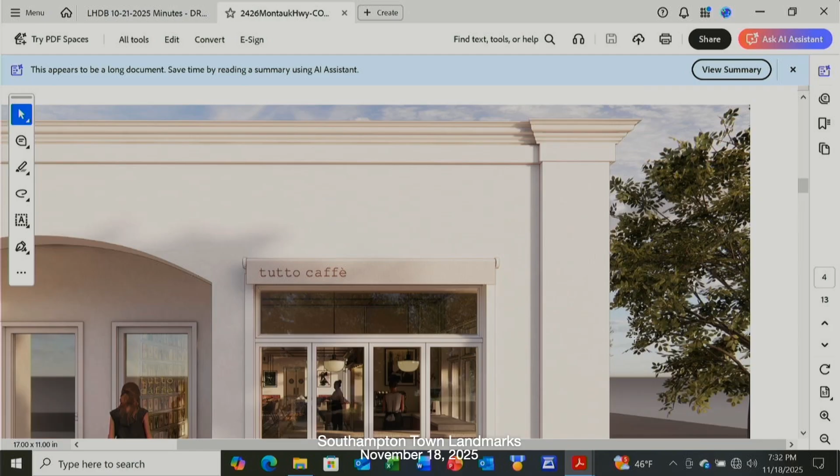Would you like to come up to this way, so we can hear what you have to say? The only difference was movement to the windows and doors relative to the approval you already granted to the color change. Great, move a little closer to that microphone. Oh, sorry.

Okay, so I have on the screen here what's proposed, I believe, which is the large window. Is that a folding door that opens? Yes, in the front, that's the same - forgive my lack of architectural knowledge, but that's the exact same opening. It's just a change of windows, and it opens up to the outside.

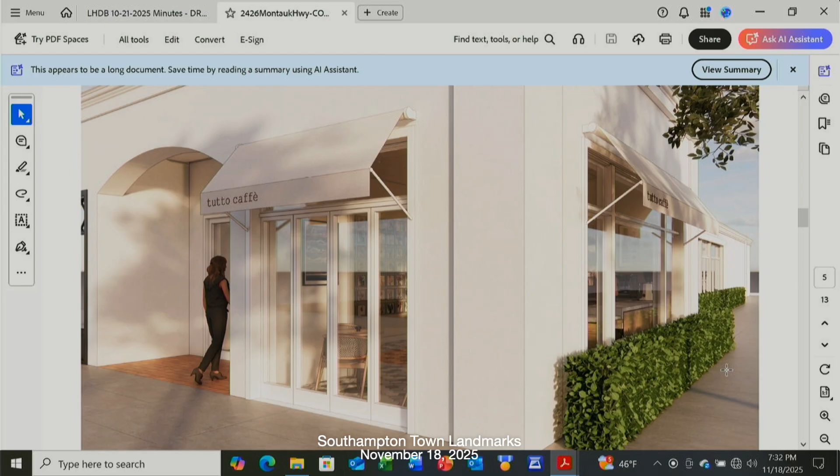Okay, which would allow fresh air, yes. And the change is on the side facing the parking lot, down to the right. I think it's probably the next picture. Yeah, this one? Well, that's the exact same opening also - new windows.

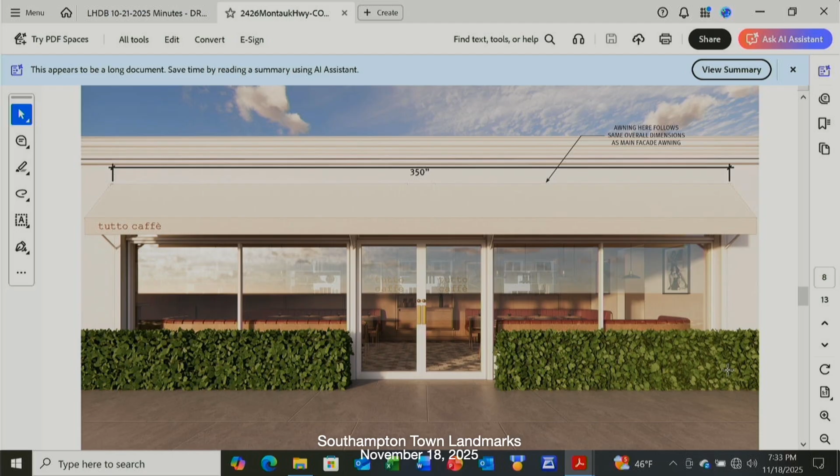So that door is now moved. It used to be to the right where the hedges are. We moved it and put windows on each side. It allows more natural light into the space, which with hindsight should have been done probably 30 years ago, but that's a separate issue. And this is a side wall facing the parking lot? This is facing the parking lot, facing where Thayer's is on the other side.

Okay, correct. Yeah, there's no structural change to the building, there's no expansion, just new doors and windows, and in my humble opinion, it's a refresh, a little bit more brought up to date.

Looks like you're adding a light here over the door. Is that going to be behind the awning there? The Architectural Review Board discussed that with me, and we discussed that the architect might not have been aware of that. It does conform with the approvals as far as lighting going down, dark sky, and all that sort of thing. But that might be something we would adjust - I think he discussed something that was discussed with the Architectural Review Board.

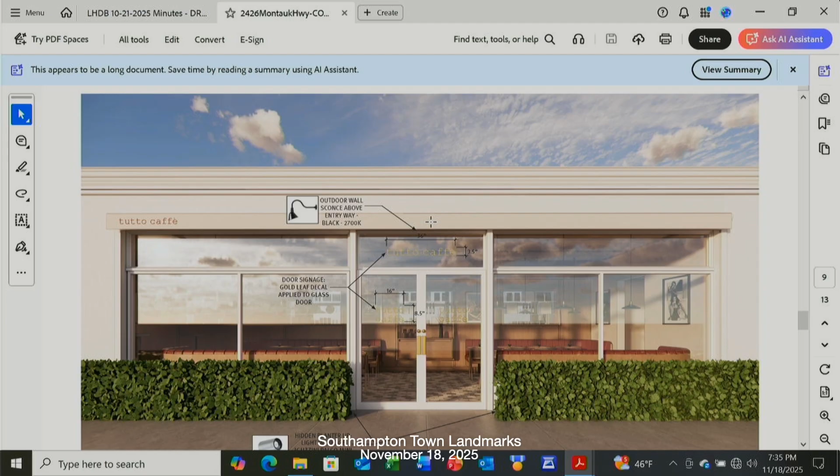Okay, this is an existing condition, yeah, that's existing. And this is the other existing condition, yeah. Could you go to the front view, up one, to the existing? Now, is that all one building? It's all one building, correct. So, right, so the only thing changing there is...

So are you gonna do anything on the left at all to match it? I guess that's like the front view, and I see two windows that match. Well, actually, you know what, to correct myself - it's a very good question you asked. We would at this time like to make that window on the left match the one on the right. Now, it won't be an opening one, but it would be without the little detail up here.

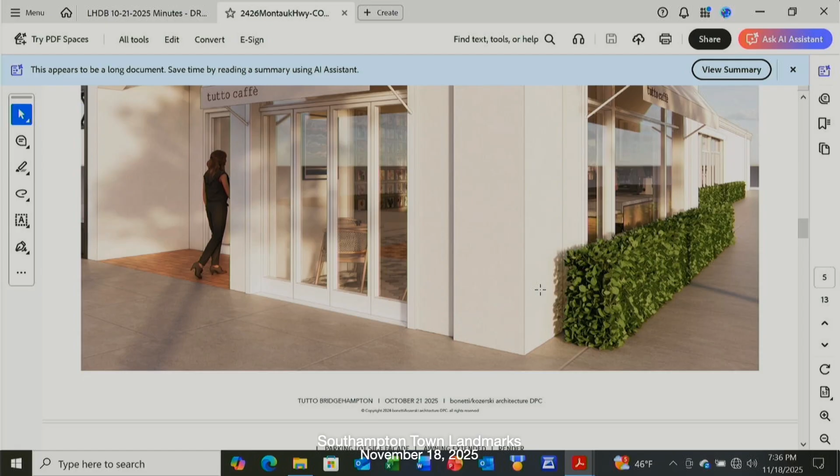Okay, is it going to resemble - well, let's go back up to your entry. It would match that, yes, without the openings, without the doors. Correct. Would there be vertical divides in the glass to mimic the pattern in the operable door on the other side, or would it be a single pane of glass? Probably just plain glass. That would make more sense, honestly, over there.

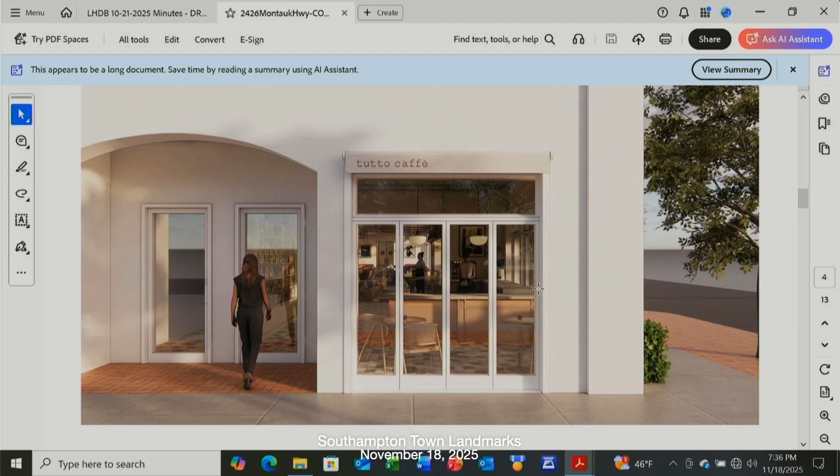So this application only includes the Tutto Caffè side, it doesn't include the left side. That is correct. Are you gonna be submitting another COA for the other side of the building, or? We're not doing anything over there. Well, I guess we would have to - if you're going to be changing the windows on the other side. I mean, I don't need to change the window. That's a very good question, and to be quite honest with you, I hadn't thought about that prior to you asking me that.

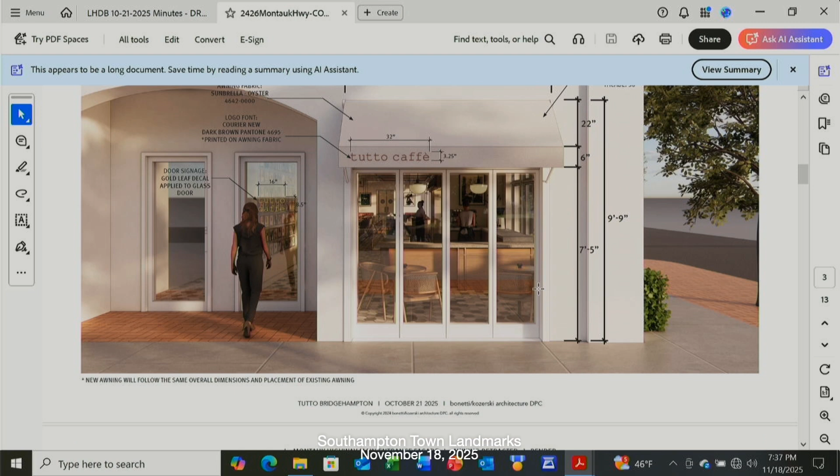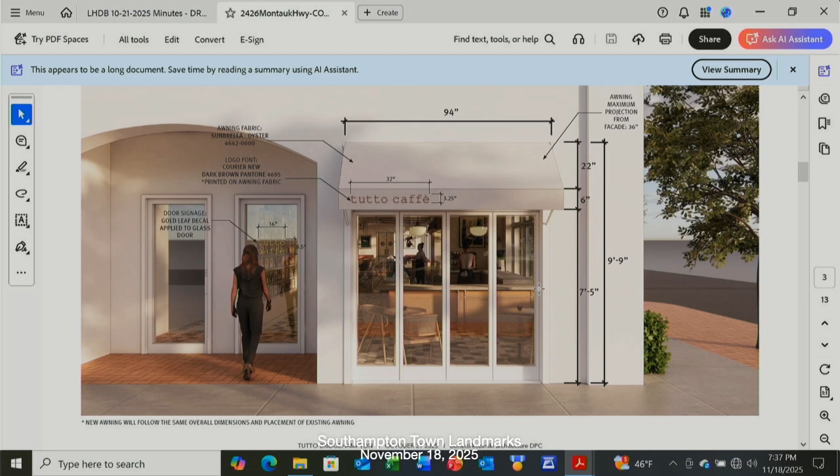And I wouldn't do it without your approval, but the plan was not to do that immediately. I was thinking of doing it down the line because we needed to order some new windows, and we've already discussed that we might as well just order two while we order one, but we're not gonna do it without your approval. That's a very good question you just asked, so thank you for that.

What is the timing on getting all of this done? Would it be more efficient at this point to suspend this COA application and put in a revised one that covers all of the work you plan to do, or? I would actually prefer not to do that, and I don't need to do the one on the other side of the building at this time, because we are under somewhat of a time constraint to do this for next spring. Okay, that's our ideal, so it would be for this side.

The other side, if we were to replace that top part of that window, that's a one-week job. I would come back to you and get your approval and just do it at that particular time.

We just thought about making it more consistent, without the blue Ferrari in front of it. But that was just there when we took the picture. Yeah, that was a joke, but that's okay.

So did that answer your question? Yes, it does. So you're only going to be doing work at this point in time on the right-hand side, easterly side of the building? Correct. So we're going to take it from looking like this to looking like this.

Correct, and this has been 30 years. We did this 30 years ago in 1995 when I purchased the property, and it hasn't been touched since, and it does need a refresh in my opinion. Which is why we're changing the color also. Since I was here last time, things happened with the tenant and so on.

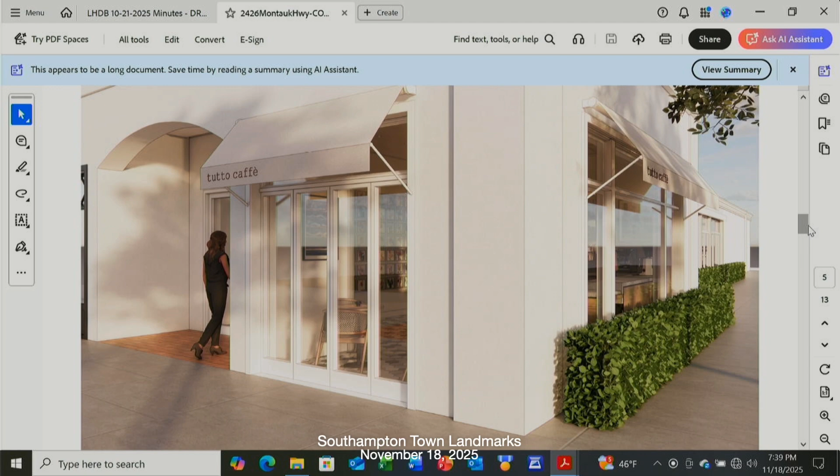It is going to change the appearance of this building considerably from this. The whole stucco appearance is not particularly going to change, it's going to be a slightly different color. But these are kind of interesting, historic-looking windows, not so visible with the awning here. So that is going to be a major change, replacing them with modern windows.

Well, the awning on the left is also rolled up at this particular time, so in that picture you can't see it.

I hear you. Right now they do allow outdoor seating there, which actually would be more conducive with the doors that open. Personally, but I see that, yep.

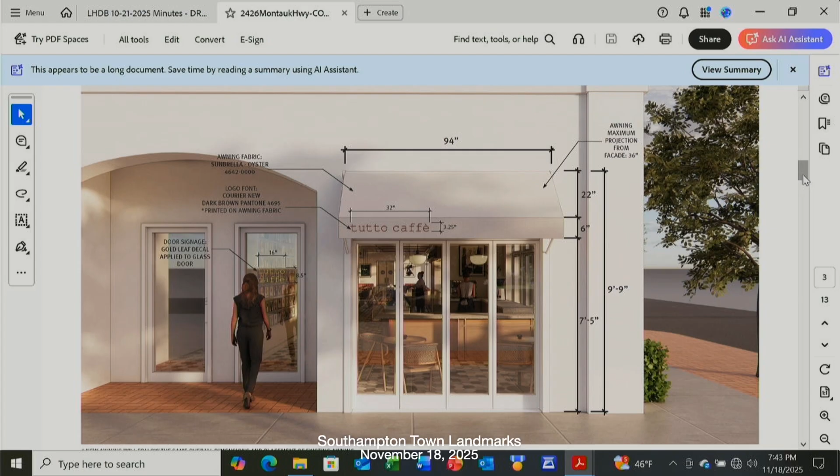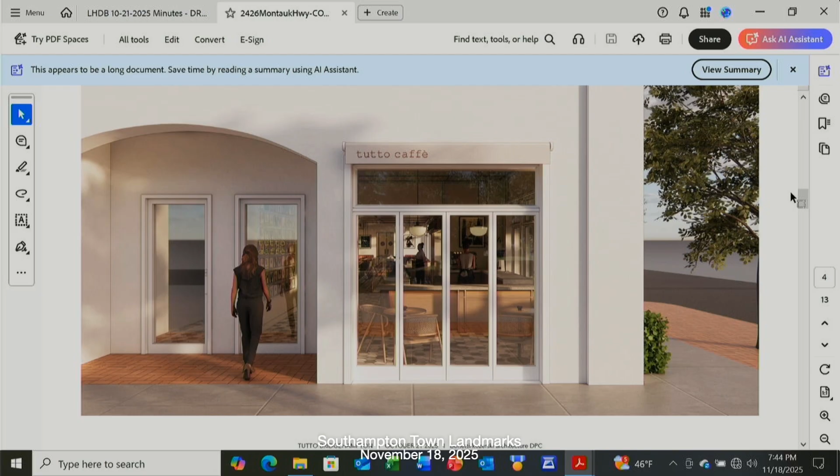My intention is to make the two windows, especially with the transom area, match, so that if the awnings are retracted, they would match. I'm not necessarily sure that having opening doors, which personally serves what's going on in the community these days with outdoor seating and so on, which seems to be something people like, is contrary to a full pane window on the other side.

I readily admit I can't name every storefront on the street and tell you what looks this way or the other. I do know Bobby Van's has opening windows and doors. I'm not sure how everything is completely consistent, but whatever. That's my comment.

So the two doors to the left, are they being changed? No, those doors are staying exactly the same. Those are the existing doors that are there now. Because they don't match the photo there - one has a light cut at the top, the other looks like it's painted black. The architect probably took a little artistic license, but we're not changing anything with those doors.

Okay, so the doors are going to stay like this. Yeah. Okay, the color of the building also looks lighter in the architect's drawings? We already got that approved by this board. We went through the COA for that. The only difference is we're changing it from yellow to basically an off-white.

So did we discuss the awnings at that time, the color changed as well? The awnings, I don't believe had been addressed, but when the time comes for the awning to be replaced, that will go to the ARB, I believe, or it'll come here too, because this board came into being after the last time we went for awning approvals.

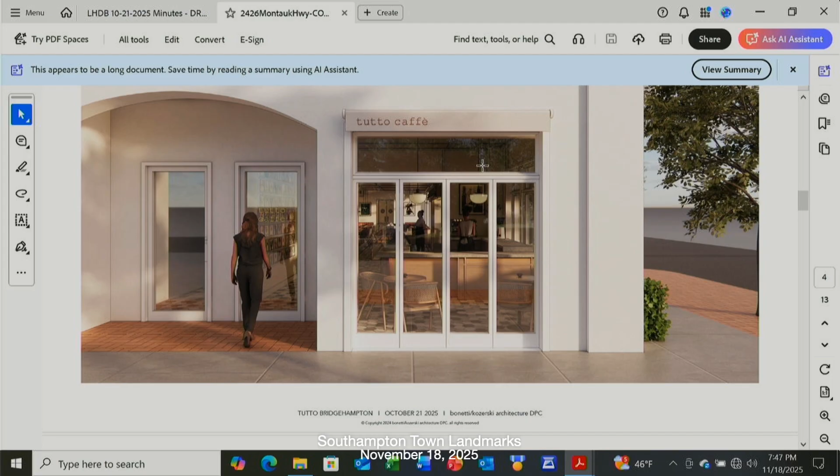My personal opinion is I hear where you're coming from to a certain point, but I don't necessarily agree that it fits in with current architectural standards and what things look like within the community. I see things on that street that I question myself, further down the road to the west, where that building company is - I don't get it, but that's a separate issue.

That's why you're here now - because of that, that's why you're here now. Yeah, the community has spoken. Okay, fair point, and it's a very fair point. I get it. I mean, I personally think this is a really attractive, good look.

I think it's a more contemporary look, and that may be up for discussion - contemporary versus historic. I'm not so sure I'm going to call it that. This was one of the first projects I ever did when I got involved in the business that I'm in, and the architect that did it for me was a very traditional architect.

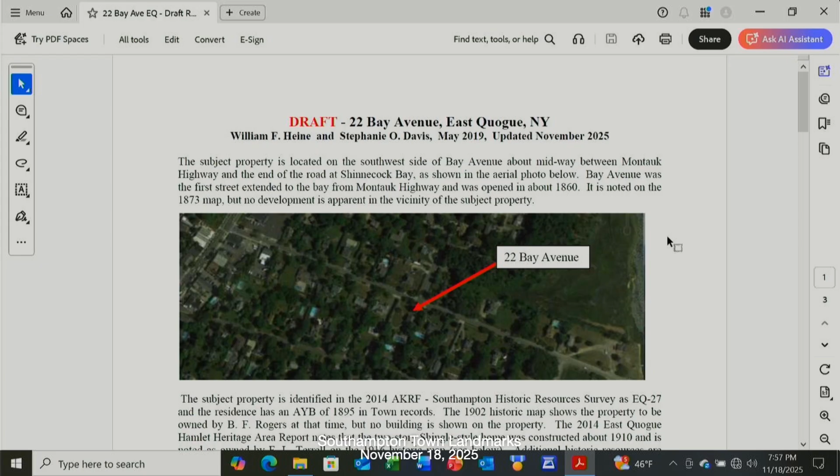In 2019, a large addition was done on the rear of the residence. The roof line on the second floor shed dormer was modified and a bay window was added to the side. Since that time, a swimming pool has also been added to the property behind the house. The current application is for construction of a one-story garage pool house next to the existing dwelling and conversion of a third-floor bedroom to a bathroom in the dwelling.

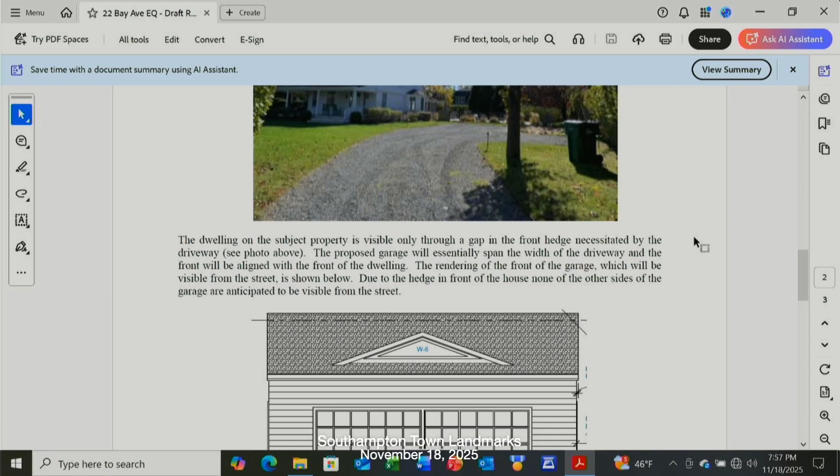The floor plans do not show the windows on the third floor, and exterior elevations of the dwelling were not presented as well. But I did speak to the applicant and was advised that the windows will remain as they are. They're not being changed. There are no changes to those windows, so there will be no outward appearance to what occurs on the house.

The dwelling on the property is visible only through a gap in the front hedge necessitated by the driveway. The proposed garage pool house will essentially span the width of the driveway and parking area and be aligned with the front of the dwelling, not the porch, but the first floor wall beyond the porch. Due to the hedge in front of the house, none of the other sides of the garage are anticipated to be visible from the street. As you go down to the drawing, this is the garage that's presented.

Stephanie and I had discussed this, and it's a little awkward in the space above the garage doors, which is unusually high. The reverse gable is unusually small. The garage doors are not specified. Oftentimes, doors that look like this contain translucent panels so that when you turn on the lights on the inside, it glows through the doors on the outside. And it doesn't really have any of the character or details of the dwelling on the property.

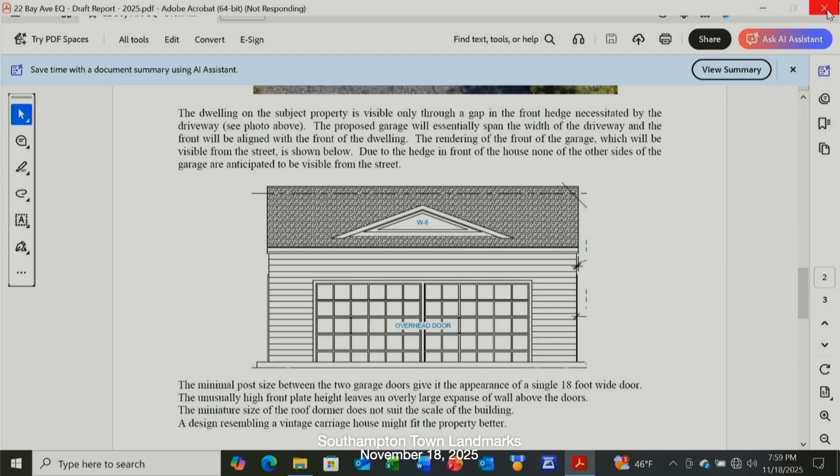So we were hoping that—and I know there were variances granted for this garage—that it could be pushed back a little bit. There is room behind this building. Between it and the pool, it could shift back a little bit so that it wasn't as prominent as the front of the house. And if it could be detailed in such a way that the reverse and the doors were more in keeping with the historic character of the dwelling.

Yeah, and the house is in great condition, and also the AKRF had stated that it was worthy of review for landmarking.

Would you like to say a few words?

Hi, I'm the agent for the application, Susanna Herman from N Consultants. I don't know if the architect was able to attend on Zoom. I know he had a sick child and I wasn't really expecting him.

Moving the garage/pool house back away from the road would be problematic. We would have to go back to the Zoning Board of Appeals. We had to get a small variance from total side yard setbacks for that.

It's pretty close already to the existing slate patio, which the family uses adjacent to the swimming pool. It is set back visually from the front porch. It's in line with the front of the house. And it's designed to work with the pool and the addition that was built in 2019. It's sort of centered or lined up with the edge of the pool so that it works as sort of a backyard, courtyard type feel when you're in the backyard.

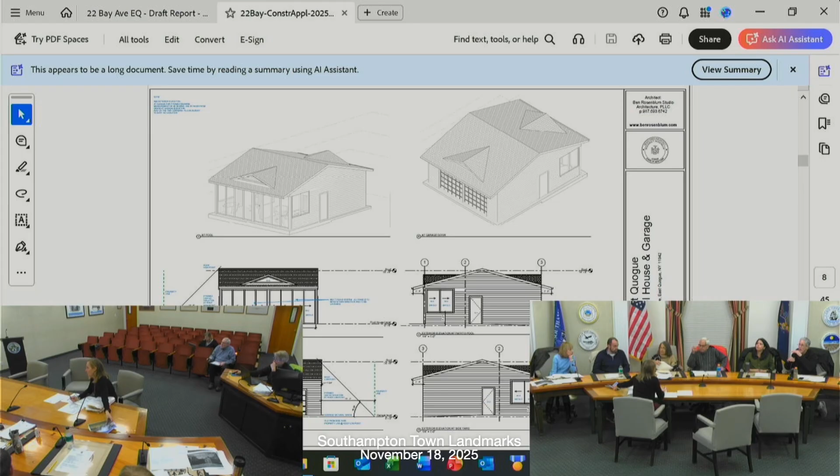You don't see the addition in the back, but you do see the front of the garage. And I can understand, looking at the cross-section, that they want to get greater height in that sort of pool house section on the back of the garage. But they could bring down the plate height in the front, because that's just the garage inside.

If that came down closer to the top of the garage doors, it would look more like the height of the porch. I think there wouldn't be as much of a need visually to push it back further, because it would relate a little more to the scale of the house.

Just to answer your question, the height of the garage is 14 feet. That's not the concern, it's the angle of the roof. I'm sorry, I'm not an architect, I don't know.

What does plate height mean? Plate height is the top of where the wall would meet the roof coming down. So the lower the plate height, the more the roof comes down, the scale of the building when you're looking at it is lessened.

It just seems a little bit overscale for having it be so close to the house as it is. Right, so that would definitely help if they could bring that down, so it looks more like the height of the porch - so this garage doesn't look so massive.

So we'll let the architect kind of determine what would work, especially if they look at elevations of the house, of where the line of the porch is, because it is so close to the historic house, it's really important to have a balance and take some sort of datum from that house and carry it across if we're not able to give it as much breathing room and space.

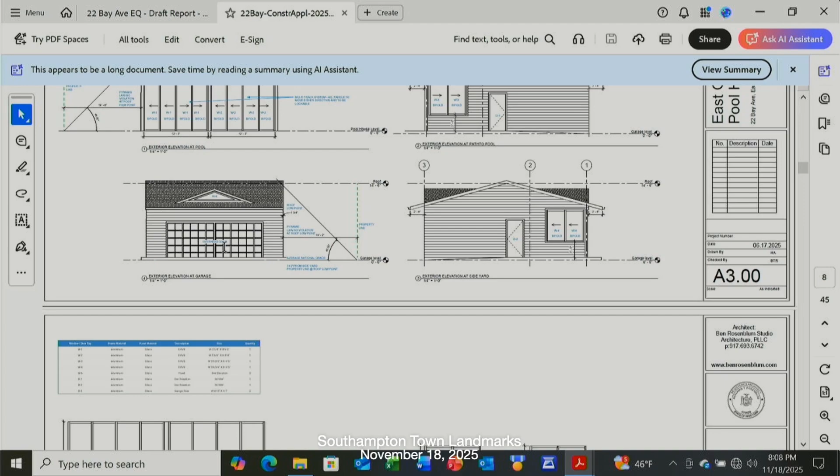And the glass in the door is not a traditional detail, but it is a popular one. Changing those to something—it could still be a roll-up door, but a solid door with more of a carriage house look would be far more in keeping with the style of the house. And again, if there was any thought of landmarking in the future, it would certainly help to have something more copacetic with the architecture of the house.

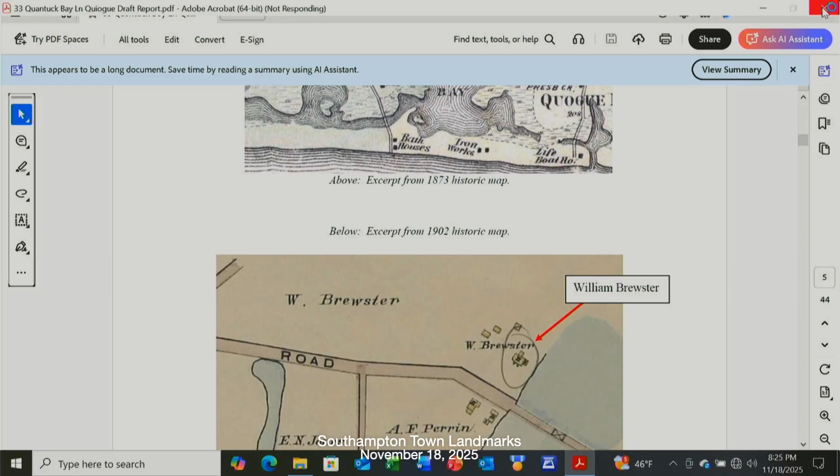So yes, the house has an AYB of 1756. The garage and a shed have AYBs of 1935, but the shed no longer exists.

The AKRF says this, known as the Silas Brewster House, appears to be an early vernacular structure with a cape form and early L addition. It has brick chimneys and wood shingle cladding. A number of changes have been made to the structure, including two apparent later additions and multiple gable dormers.

In the photo, you can see this portion with the dormer. There's another one behind the first floor gable where the gable end is charred - that was the entry. There are two dormers on this side, two on the other. We believe from being inside the house that that's the oldest portion. To the right looks more like 1910, 1920 - much more shingle style inside.

The framing materials we could see are smooth sawn dimensional lumber. In the earlier part of the house, there are axe marks in a lot of the framing. As I took photos under the floor, I couldn't see well, so I just aimed my camera and took some pictures, and a couple came out okay. There are just peeled logs underneath the house - it's built right on the ground. There is no cellar anywhere under the house and no access into it any way that we could find.

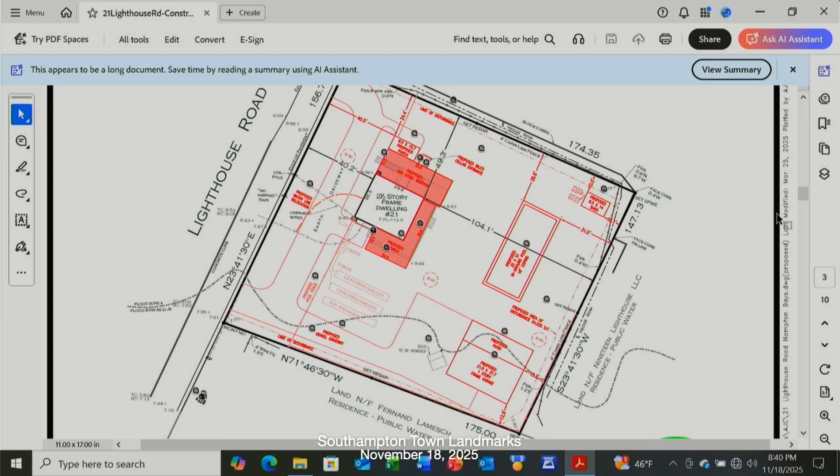I think you looked at this one, Tim? I did. We had reviewed this in 2024, and it came in as a reapplication for some work on the third floor. When we were reviewing that proposal, I noticed that some windows in the plan were different from the original application, so we asked for updated exterior elevation drawings. When the drawings and photos of as-built were provided, it differed from the original approval, but I think in a way that's more in character with the house. So it was a case where deviations between the approval process and the construction process worked in favor of the resource. How unusual.

I put it in a document I sent out today, whether as a board we should talk about whether we could or should have some sort of mechanism prior to a CO being issued to ensure there's at least some conformance with the approval before a certificate is issued by the building department. I know that's a big ask, and in this case it's not really relevant to this application, but it could have gone a different way.

If they amend their application, the building department is supposed to send it here, which they did in this case, but it seems they amended the application after things had been built. The porch details changed significantly—they improved architecturally, but they were different.

So what you're suggesting is that it be resubmitted for our review before they make the changes? As a matter of procedure, I think that would be good. If you're getting an approval from the board and not an objection, and you do changes to footprints of porches or other things, it would be nice to have what is actually built reflect our recommendation.

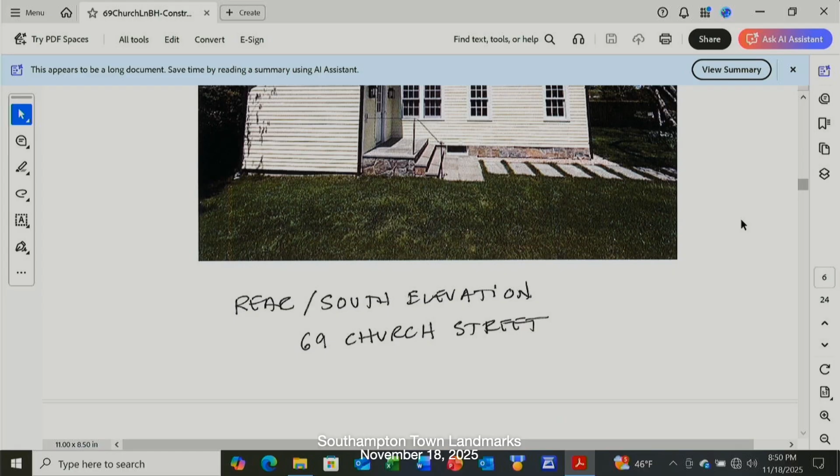This is the portion of the building where the changes are going to take place - this is essentially going to be bumped out, and here's the other side of the building. This is the art studio in the back with a pergola on the side of it. There's the inside of the pergola, and a bunch of photographs of the inside. I'm trying to get to the elevations at the bottom, where we can get to some interesting stuff.

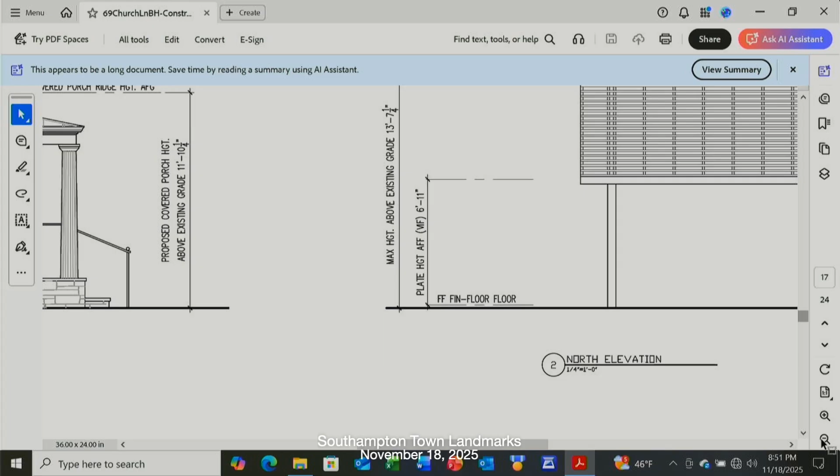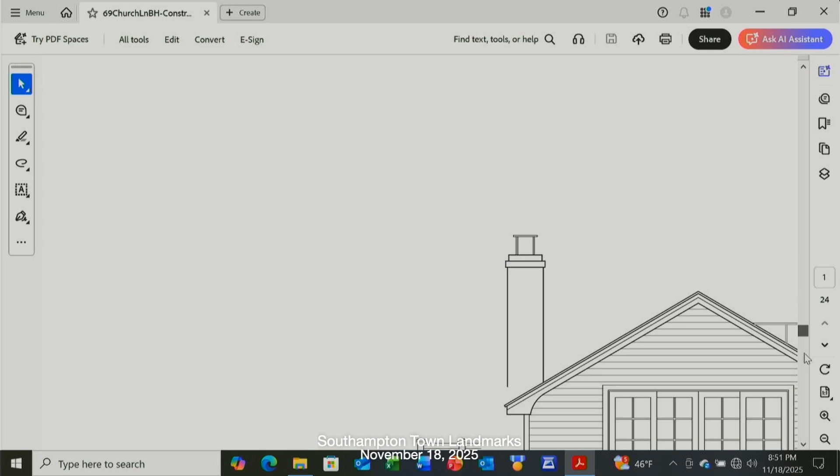If it will please - let me shrink this. No, it's not responding again. Damn it. It was behaving itself so well in the beginning, and it never did this when we tested it out. Okay.

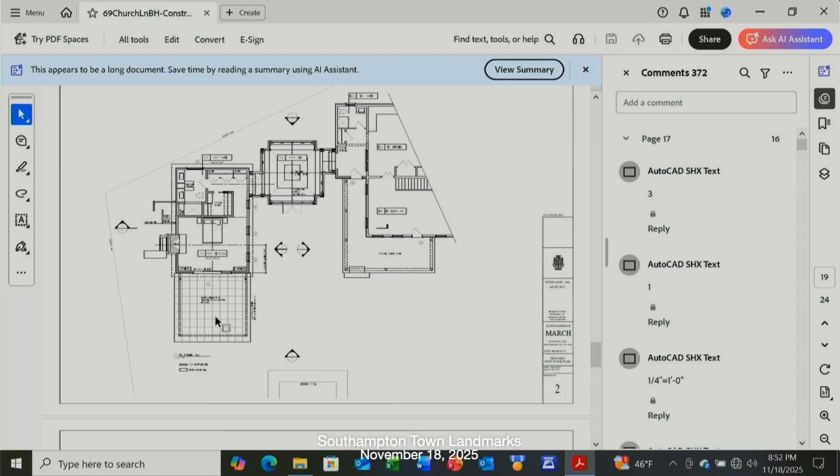Okay, so here's the layout. They've cut off the front of the building. This is the rest of the front of the house since there are no changes. This is the wraparound porch I spoke about. This is the connecting building, this is the art studio out here, and then the patio with the pergola over it that's proposed.

Let me see, these are some of the elevations. This is what the art studio pergola is going to look like. This will be the connector going from the back of the house to here. This is what it's going to look like from the side of the house. You can't see it from the street because it's all behind the house.

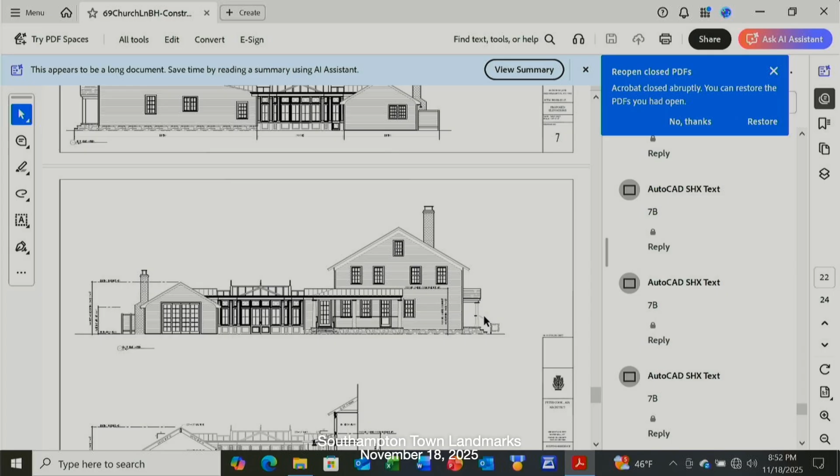Is that a breezeway or is that heated space? That's a good question, and I'm not sure I know the answer to that.

And then this is that wraparound porch again. This is the art studio in the back, and then this is the connecting structure. So that's what's proposed. I didn't see any particular problem with this because it's all going to be behind the house and not visible from the street. And there's no changes proposed for the front of the structure.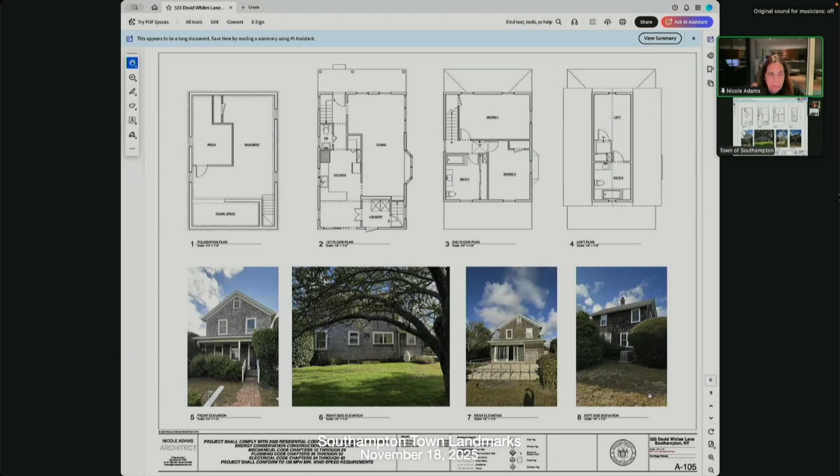So would we be able to do that separately from the roof and siding so he could get going? I think if we're replacing roofing material in kind and siding material in kind, I don't think we have any issue with that. That's essentially maintenance.

So the windows, will you guys need to go take a look, or do you want documentation from me? Yeah, why don't we start with documentation from you. Okay, no problem.

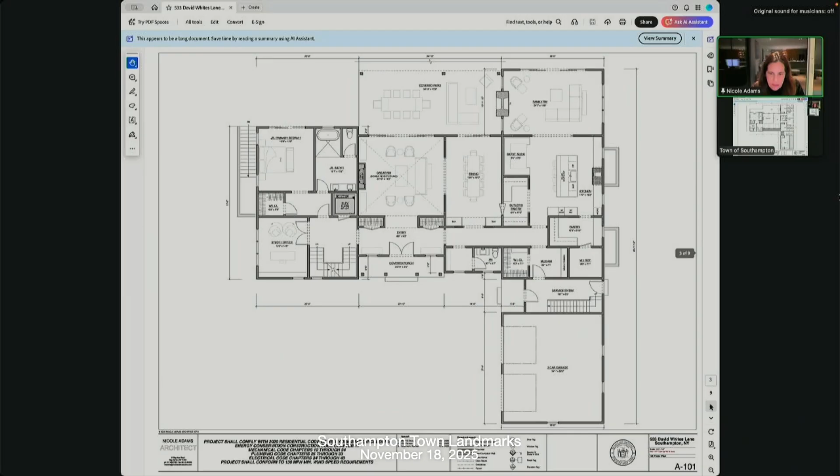There was one other topic we wanted to bring up. We know this is not your jurisdiction, but we're in the process of going through ZBA approval for the property, where we would build a house, have this zoned as a carriage house, keep it as existing, and build a house in the back of the property. The property isn't landmarked, just that house is landmarked, but we wanted to have this conversation as a courtesy and show what we were planning on doing. We did a little perspective from the street of what you might even see of that house behind.

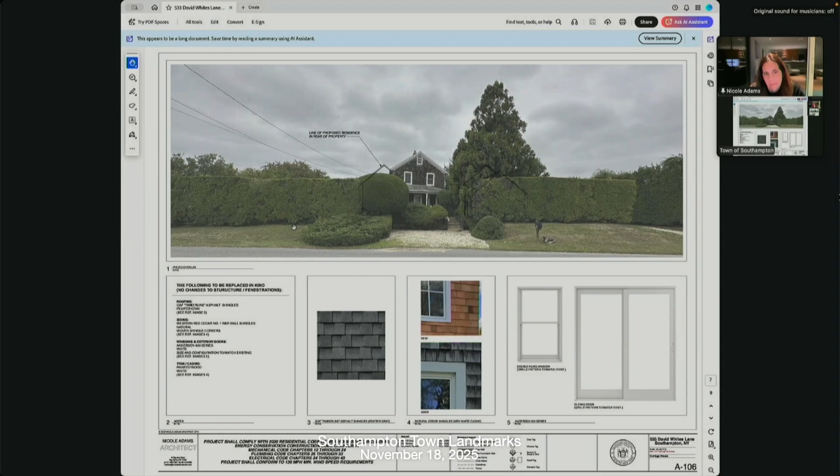So the proposed house would be behind the existing one. If I go back to the site plan, obviously the existing house does not conform to any of the setbacks, so this new house would be completely within the side, front, and rear setbacks. There's a front hedge, which is what we see in that photo, and another hedge behind the existing carriage house that would also buffer it. From the street, with the hedge, you don't really see the new house.

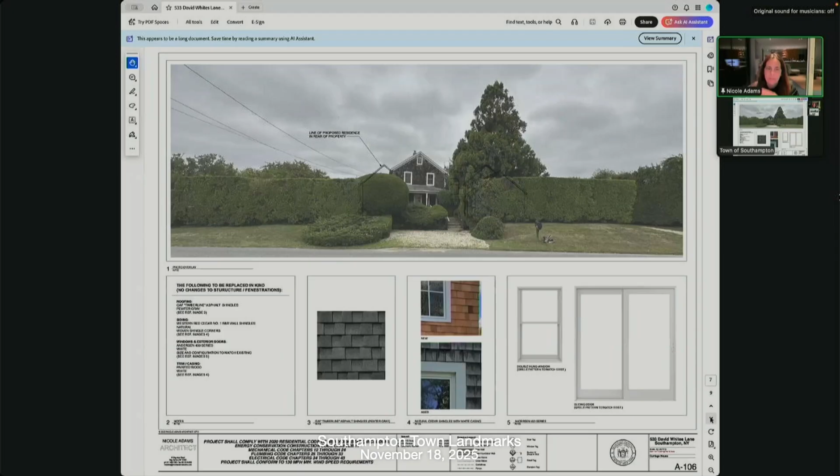Is the intention to retain the hedge between the two structures? Yes, it is. If the hedge were to die or not be maintained, you're gonna then have a clear view of the new house. Yes. Although that's not usually the case - the hedges only seem to grow rather than go away.

Stephanie, did we receive a link or any plans? I looked, couldn't find any. Yeah, there was a set of plans, which is what's up there right now - it's a 9-page document that was circulated.

If we're going to issue a COA for windows and anything else that you're actually changing on this structure, as opposed to maintaining in kind with existing, we should see that in a COA application with the associated plans for those changes.

I'm sorry, could you say that again? Plan changes to the structure? There's no changes to the structure. Well, you're talking about changing out windows. Right, okay, that's a change, that's not maintenance. Replacing shingling in kind with existing, replacing roofing in kind with existing is maintenance - we don't need to see a COA application for that. But if you are proposing to change out windows, change out doors, and do other things that change any historic fabric in the structure, that's what we need a COA for.

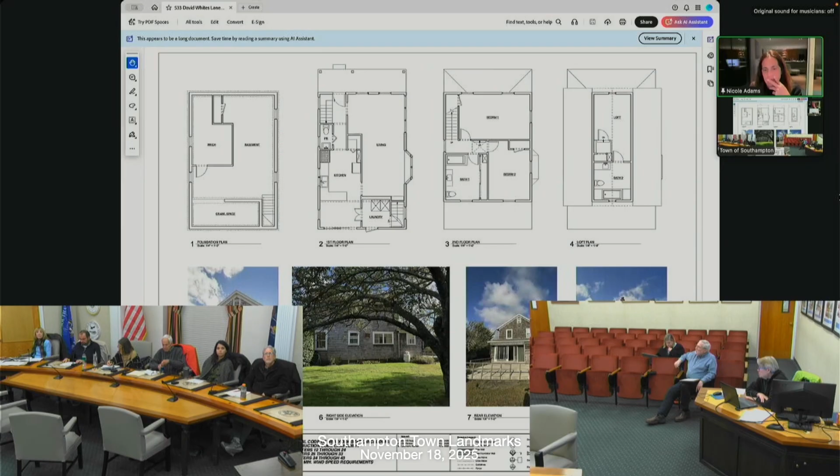I believe the plans show an existing generator on the property to be removed or moved. Do we know where it's going? Yeah, I think I got an email requesting information on it, and I think I said that they actually decided that they're gonna leave it there. Okay, so the generator is not going anywhere.

So then, do you happen to know, did you happen to see anywhere where there's a permit pending on that generator? I don't have that information. Is it in your records? Okay, yeah, so we'll leave it in its location. All right, so when you submit the COA application, the plans should just show existing generator to remain. Okay.

Any other questions? Okay, the owner may just want to jump on. So do I just come back, is it a whole other month, or can those things just be supplied to you guys? I think it will be heard in December when you've submitted the application and we've had time to review it.

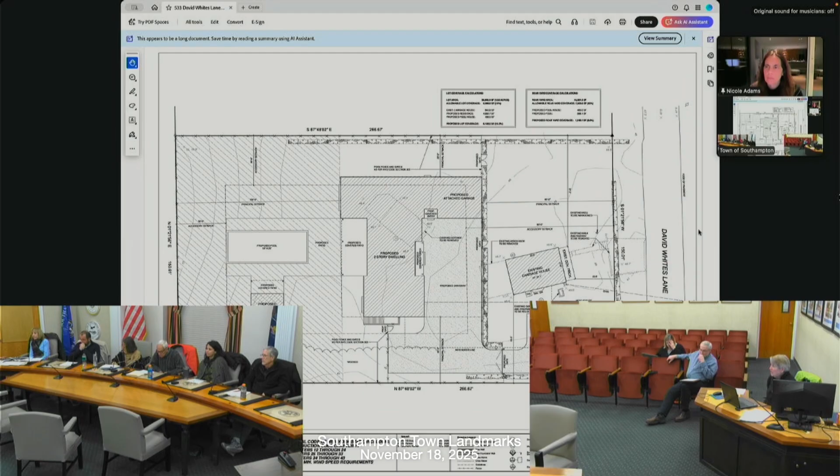And we may want to go take a look at those windows. Okay, so that would be the schedule. I'm just out of curiosity, what constitutes a window, just because I'm curious, what would constitute a window that would be of worth, if it's not like an 80s window.

It would be a window that would be something that would be either original to the house, or a window that would appear of a similar nature to what would have been original to the house. So I wouldn't have expected this house to have 1/1 windows originally. It might have had 6/6 true divided light windows, something like that. So usually when we take a look at these buildings, we can kind of tell what is likely to have been original and what is likely to have been a replacement.

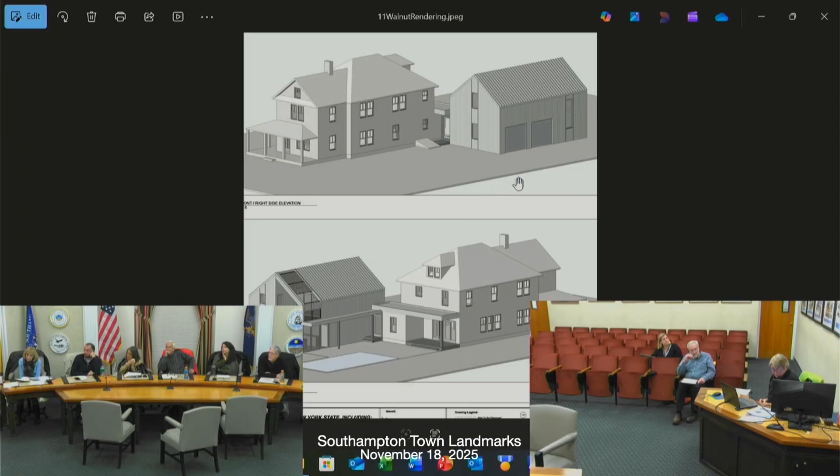It was felt that the structure might be out of keeping with the character of the house. So the question is, where do we go from here? He doesn't have this built yet, but he's obviously invested in plans and would like to get his work done. Bill and I were just talking out there about what could be done to make this garage more in keeping with the house, and it may be that because it's separate from the house, it may be okay. So, opinions from the board: what do we think about this proposed garage?

Do we know what material the siding and roofing will be? I don't know what the roofing's gonna be, but he's supposedly gonna have solar panels on the south roof. It looks to me like a standing seam metal roof. He did mention vertical siding, boards allowed to weather. This house has weathered shingles, so the siding color sounds like it may be similar to the color of the house when the boards weather.

Is that the south side? This is the south side. I thought that house was on the west side of the street. No, it's on the east side. Okay, the street's not straight north-south, but it's on the east side.

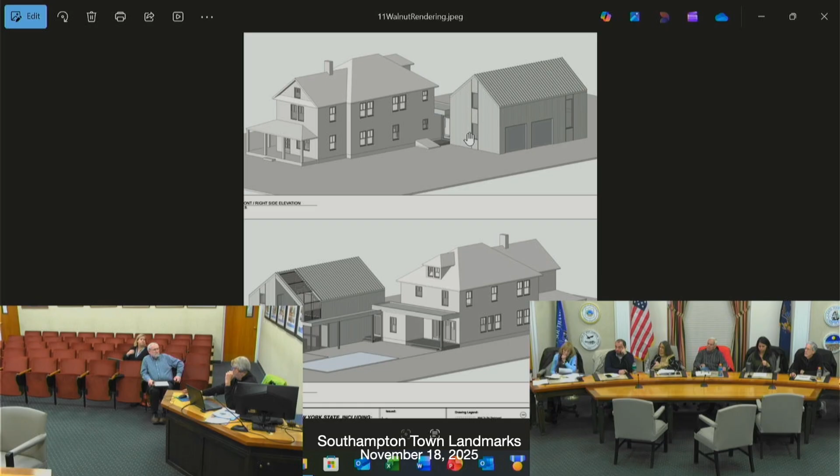Okay, this is the front facade. This is the facade you see, which I know from the plan you had, Julie, wasn't a three-dimensional plan, it was just flat. So it looked like everything was right front and center.

I mean, it's understood that it's set back and it's not obstructing the view of the south side of the house, which has now become quite visible because they removed quite a few trees and things. Well, it's always been fairly visible.

Even when we went there earlier, there's a bunch of walnut trees in the yard. A bunch of them have been removed, but there's still some. The house has always been pretty visible, at least from the times we've seen it the past couple of years. Originally they did have some shrubs around the front that were pretty overgrown, and they've been removed.

And this is what it looks like now.

I think there's kind of two ways to think about this. You could think that it's a separate structure from the house, set way back from the house. What you're going to see, you'll see from the street—there's no question about that. Probably won't see much of the side, but you'll definitely see the front facade. But you'll see it, I think, as a separate structure from the main dwelling.

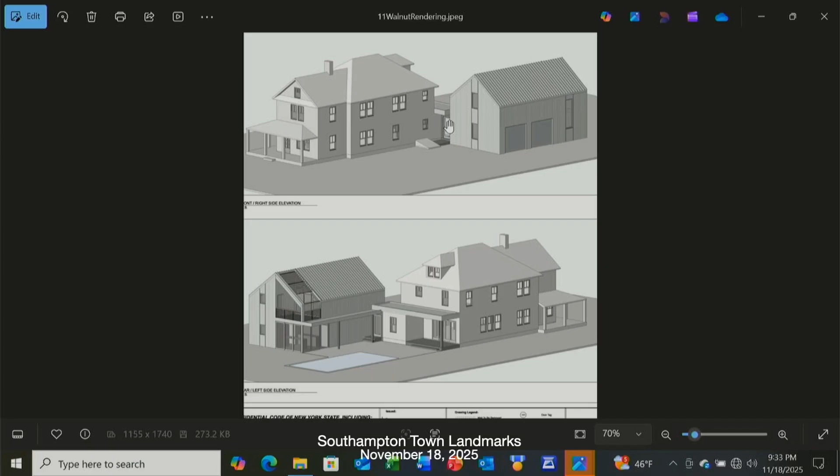Can you see it on there? There's a door facing right here - that's a door, and then there's a door on the back too, although I don't know if that's the same door. Because this is underneath the overhang, and this is right at the back, so it passes through pretty much.

Do you think it's just a door? I think it's maybe a door and another door where you can go from front to back. So then it is conditioned space then? Not necessarily - could be a screen door or something. Yeah, or it could be a solid glass door.

I mean, we have a breezeway at our house, and it's totally not conditioned space, but it connects the garage and the main house. Do we have a floor plan for that? No, the new addition, we don't have any plans for this. If there's a bedroom in there, then it has to be conditioned space. Well, there may be a bedroom in the garage. Then they've got to make it conditioned space.

Well, that would be conditioned space, but I think we were talking about the breezeway connection. Oh, it does? Yep. Oh, interesting. Okay, that's a good thing, because otherwise you just stick your little roof walkway in.

Well, he was talking about having an exercise room in here. What else was gonna be in there, Bill? There's a basement, and then there's the garage, and then there was exercise space, and a pool house type. Oh, pool house, yes, because they have a new pool.

This is a new pool in the back. So this pool house space is probably on the first floor. I don't know if there's anything else. We need to see the plans. Okay, so we'll see some plans, hopefully before our next meeting.